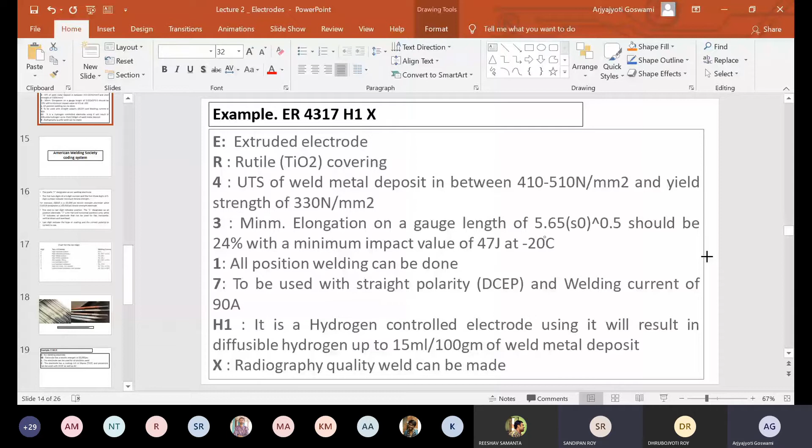होमोजीनियस नहीं हुआ दिक्कत तो डिपेंड करता है ना कि एप्लीकेशन क्या चाहते हो तुम। फॉर एग्जांपल स्टेनलेस स्टील की वेल्डिंग करने के लिए अगर बीच का मटेरियल स्टेनलेस स्टील नहीं होगा तो उसका थर्मल कैरेक्टरिस्टिक्स डिफरेंट होगा। तो मान लो बीच का मटेरियल तुम्हारा कॉपर है, स्टेनलेस स्टील को तुम ज्वाइन कर रहे हो कॉपर से, तो पहली बात तो है कि स्टेनलेस स्टील और कॉपर के बीच का जो जॉइंट है वो उतना अच्छा नहीं होगा।

कॉपर इज अ सॉफ्टर मटेरियल देन स्टेनलेस स्टील, तो जो जॉइंट है वो easily fail हो सकता है। क्रिटिकल एप्लीकेशंस, फॉर एग्जांपल अगर तुम बॉयलर बना रहे हो और तुम्हारे पास स्टेनलेस स्टील का बॉयलर का बॉडी है, उसको ज्वाइन करने के लिए तुम कॉपर वगैरह तो यूज नहीं कर सकते। मैंने बताया था ना आइडियल वेल्डिंग क्या होती है।

आइडियल वेल्डिंग में, there should not be any discontinuity between the welded portion and the base metal। So if it is not a homogeneous welding then there will be a discontinuity, प्रॉपर्टीज डिफरेंट हो जाएंगे तुम्हारे वेल्डेड जॉइंट के, फेलियर होने के चांसेस ज्यादा हो जाएंगे। तो इसलिए क्रिटिकल एप्लीकेशंस में होमोजीनियस वेल्डिंग ही प्रेफर करते हैं, जिससे कि हमारा मैकेनिकल प्रॉपर्टी सेम रहे पूरे जगह पे।

अब डिजाइन के क्वेश्चन किए होंगे तुम लोगों ने, वहां पे हम assume करते हैं कि मटेरियल इज isotropic एंड मटेरियल प्रॉपर्टीज are same throughout। तो वेल्डिंग करने में अगर हमारा homogeneous नहीं रहेगा तो हमारा वो assumption बहुत बुरी तरीके से fail हो जाएगा। फिर हमारे कैलकुलेशंस गलत हो जाएंगे।

फिर कैलकुलेट करके देखोगे हमारा बॉयलर तो सेफ है, और फिर बॉयलर में गर्म पानी आया, कॉपर मेल्ट होकर फट गया बॉयलर। फिर अखबार में न्यूज आ जाएगी कि सनसनीखेज वारदात हो गया कुछ। ठीक है, तो homogeneous weld इसलिए इंपॉर्टेंट होता है।

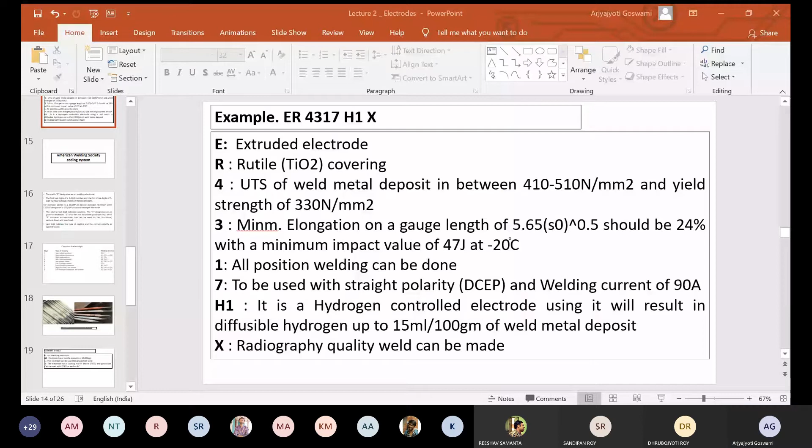सर ये जिसमें करंट का स्पेसिफिकेशन दिया रहता है सर, उसमें AC करंट से भी वेल्डिंग का कोई सिस्टम है क्या? मतलब is there any code for AC, because these are for DC only.

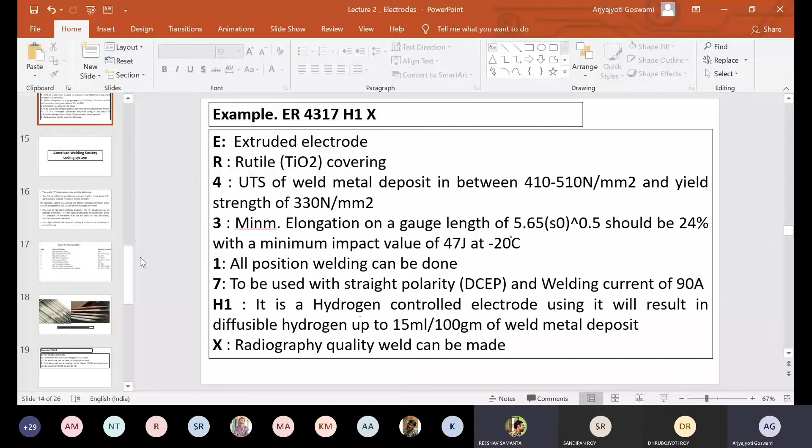DC only. See, this particular system of coding which we are discussing, this IS 814-1991 code, these are specific to DC electrodes only. So ऐज अ मतलब बोलने के लिए बोल रहा हूं मैं, जहां पे ये रहता है

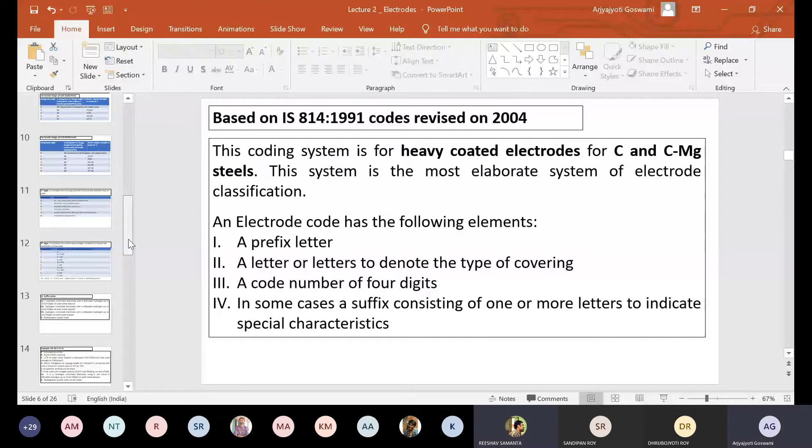कि you can use either DCEP or DCEN, most of them are better suited for using through AC supply. So but this is मैं लेमैन्स नॉलेज दे रहा हूं मैं, ऐसा होता नहीं है, मतलब टेक्निकली बुक्स में ऐसा नहीं होता। लेकिन अगर ऐसा इलेक्ट्रोड है जहां पे पॉजिटिव नेगेटिव कुछ भी यूज कर सकते हो, they are better suited for using AC supply।

But as per the book, if you go by the book, then only DC. This particular code is only for DC. Codes है नहीं, so maybe some separate codes will be there.

और बोलो, और कोई डाउट किसी को? नहीं है? चलिए फिर अगला शुरू करते हैं। तो is American Welding Society coding system, इसको हम AWS सिस्टम भी बोलते हैं।

हाँ बोलो, कोई डाउट किसी को? बोलो, कुछ बोल रहे हैं? स्लाइड नंबर 13, हाँ बोलो।

सर, वो एक बार उससे क्वेश्चन था, can I see that once? तुम्हारा आवाज थोड़ा सा ब्रेक हो रहा है यार, दोबारा बोलो। क्या?

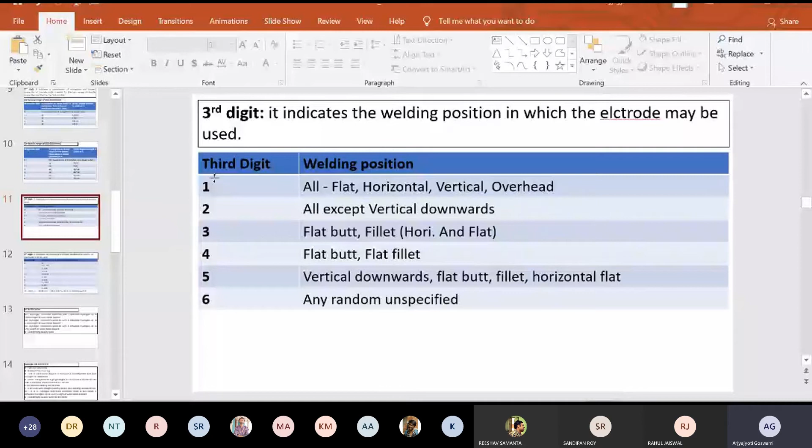Physics wala jo hai, electrode mein difference kya hota hai, how they are different in numbering. Why number 1 is suited for all position, why number 2 is only for all position except vertical? What is the difference in the electrode manufacturing, the difference is reflected in that point.

It means if it is an all position welding - flat, horizontal, vertical, overhead - any type of welding can be done. It means the electrode flux which is there will release a lot of shielding gas. The electrode wire which is being melted, its viscosity will be sort of high so that it will not fall back very easily. So the flux covering, the composition of the flux which will guard that electrode, and the composition of the electrode wire material - this is what it is.

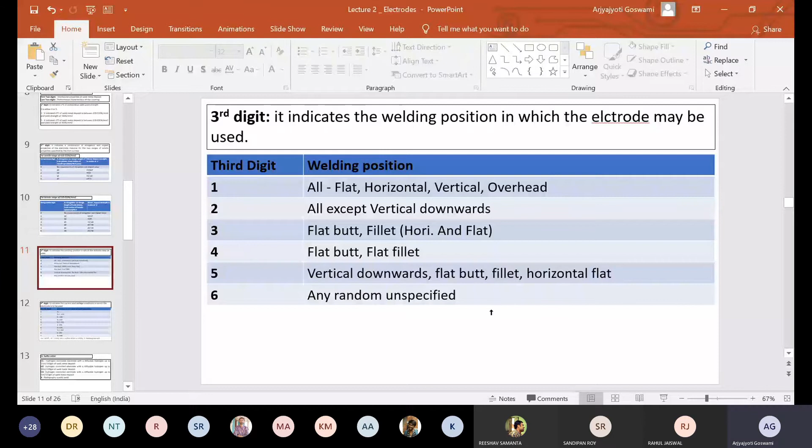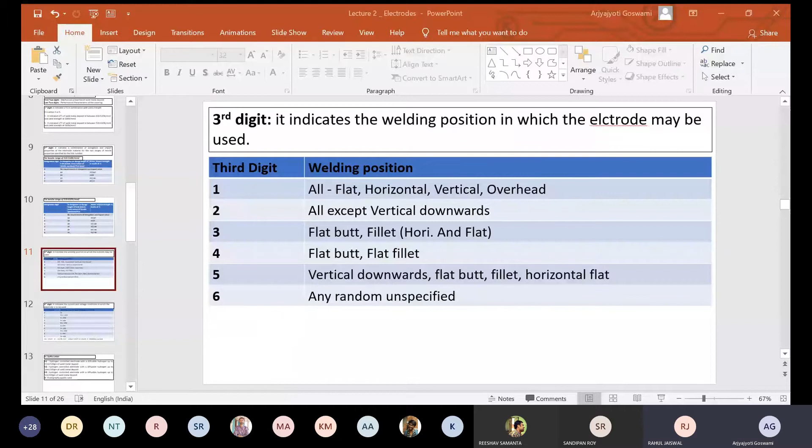Thank you sir, chalo. So American Welding Society - before going into American Welding Society classification, you should forget whatever you have learned about BIS. Forget means don't completely erase, but don't try to correlate that BIS was like this, AWS is like this, why is it so.

Don't try to just fit it in that fashion, but you should realize that AWS is a separate system of coding which has been done by a separate group of people at a separate point of time using a separate set of standards. So American standards, they are using some other standards - FPS system, foot, pounds and second system, right? We are using MKS system - meter, kilogram, second. So our standards will of course be different.

Also the BIS classification which we have seen just now is a more extensive sort of classification, but the AWS classification you will realize is very, very simple. And since we are starting it, maybe we'll be able to complete it also. It is a very simple system.

So there is a prefix E, which stands for the electrode to be used for arc welding - E for arc welding electrode. There is a 4-digit number. So the first 2 digits of a 4-digit number, or the first 3 digits of a 5-digit number, indicates the minimum tensile strength of the joint - whatever joint you are making, how much will be the tensile strength.

So I'll just clarify - there will be a prefix, followed by either a 4-digit number or a 5-digit number. So if it is a 4-digit number, the first 2 digits indicate the tensile strength, or if it is a 5-digit number, the first 3 digits indicate the tensile strength - the minimum tensile strength of the electrode.

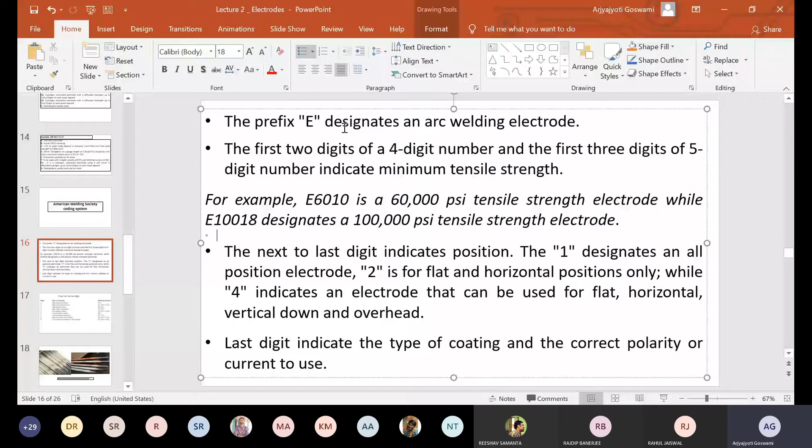It has different elements: a prefix, and a 4-digit or 5-digit number. If it is a 4-digit number, the first 2 digits indicate the tensile strength, the second last digit indicates the position, and the last digit indicates the current and polarity to be used. If it is a 5-digit number, the first 3 digits indicate the tensile strength, the second last digit indicates the position, and the last digit indicates the type of coating and the polarity to be used.

This is the chart for the last 2 digits. If the last digit is 0, the type of coating and welding current is this; similarly for digits 1 through 8. This is the chart to be referred to.

You should remember the prefix will always be E. The digits will be either a 4-digit or 5-digit number. The second last digit will always be 1, 2, or 4. The last digit can be any number from 0 to 8. The significance of 1, 2, and 4 is given here, and the significance of 0 to 8 is given here, telling you about the type of coating and polarity to be used.

Someone asked whether AC current can be used or not. AWS gives you the type of electrode for AC polarity. Most of the time AC is used for those electrodes which can be used in either DC positive or DC negative polarity - where either one can be used, AC is suitable for that most of the time. For some other classes they use other types of electrodes.

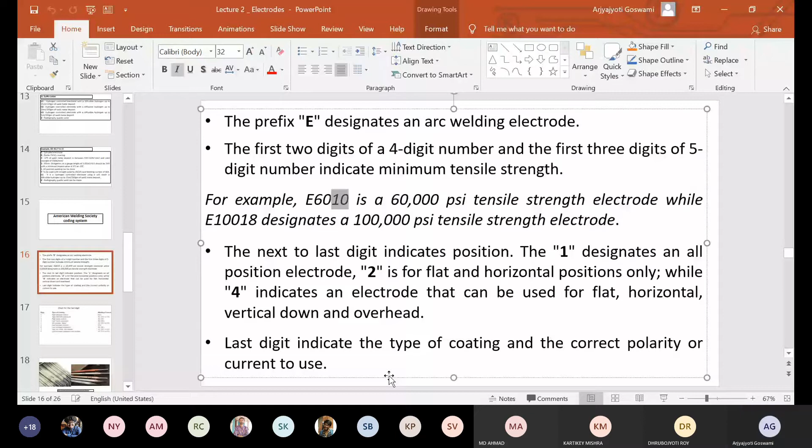The last digit indicates the type of coating, polarity and current to be used. It can be any number from 0 to 8, and the corresponding significance of these numbers is shown in the chart you've already seen. This is just a representative image of the electrode - these are the types of commercially available electrodes.

Mostly these electrodes are seen in welding labs, and even in industries you'll find similar ones. The only difference is that in labs we don't go for thick electrodes - the diameter of the electrode wire is not very high, usually not more than 5 millimeters, definitely not more than 1 centimeter. The coating thickness is also quite less for laboratory purposes, whereas in industrial applications, based on requirement, you can have different thicknesses.

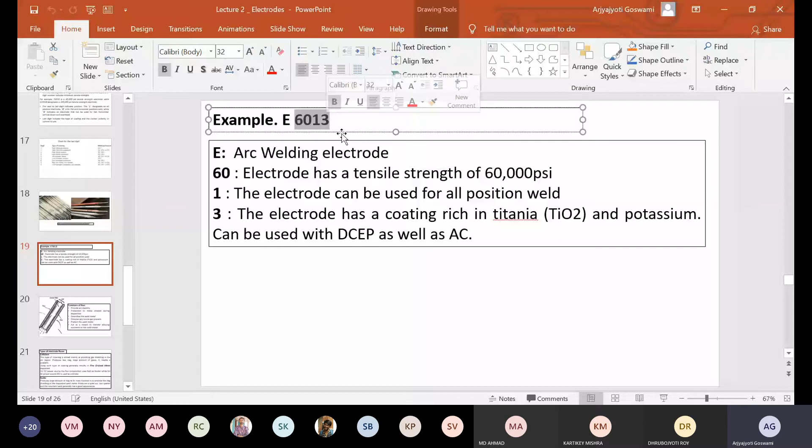So in this example we have seen different elements of the AWS system - E for welding electrode, followed by a 4-digit number. The first 2 digits indicate the tensile strength of the electrode wire material, which is 60,000 PSI. Then 1 stands for all position welding, and 3 means the electrode coating is rich in titania and potassium, and it can be used for DCEP as well as AC polarity.

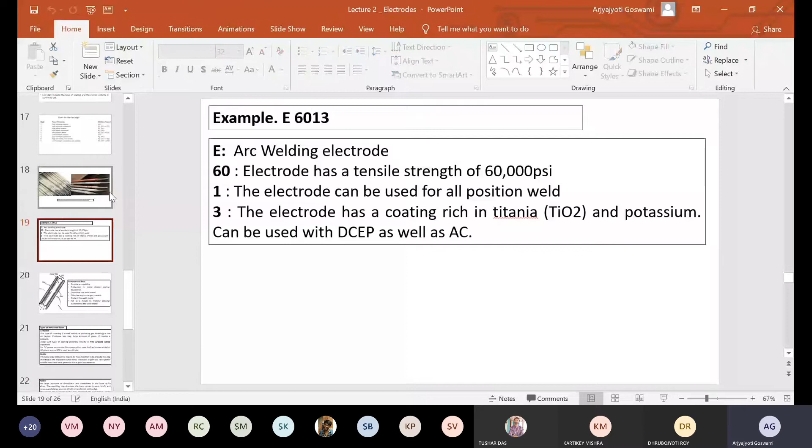So that was all for the AWS system. Today we'll finish the other portions of the electrode - we'll discuss the various functions of flux, which we have seen previously, just as a brief recap. Functions of flux: it should provide arc stability, and it should provide protection to the metal droplet during deposition. For arc stability, the flux will have some element which can aid in the formation and stabilization of the arc, elements like TiO2.

Similarly, once the flux is in, during the arc welding process the flux will dissociate and release huge amounts of gas. Those gases will give protection to the metal droplet during deposition.

Flux should also deoxidize the weld metal. Ideally, the flux should have some element which preferentially combines with oxygen, so that oxygen does not combine with the base metal and form any oxide, otherwise it will make the joint weak. So the flux should have an element which combines with oxygen, forms an oxide, and floats on top, from where it can be chipped out or ground off.

Flux should dissolve any solute gases present. Flux should protect the weld metal, meaning the flux will form a slag which creates a solid covering on top of the deposited weld metal, preventing further oxidation.

Flux can also be a means to transfer alloying elements. As I've discussed previously, if you want to add alloying elements into the weld but cannot change the composition of the electrode wire material, you can add small amounts as part of the flux, so that when the flux dissociates or melts, some alloying elements can enter the weld zone.

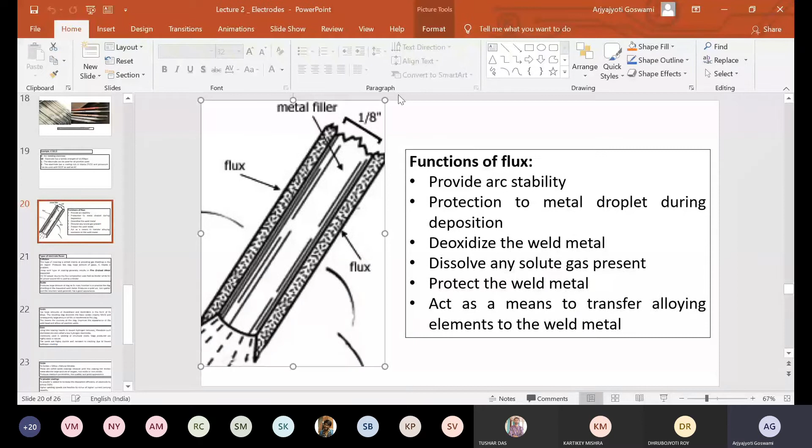So the functions of flux in detail we have seen previously, so I'm not discussing it too much right now. I'll move on to the types of electrode fluxes.

This type of electrode flux we have not seen previously. There are a few basic types of electrode fluxes. You should remember this from the BIS system of electrode classification, where we saw acidic coating, basic coating, cellulosic coating, and so on.

Cellulosic coating: whenever cellulosic coatings are present, the main purpose is to generate a lot of gases. We're not concerned with other types right now; of course it may still function in other areas, but its main function is to provide shielding. The cellulose will disintegrate and generate a lot of shielding.

So if you use this type of electrode, the slag will be less. It produces less slag but a large amount of gases, so that the shielding is proper.

Using such coating generally results in fine grained metal deposition. Since the slag is not being formed, the deposited weld cools very rapidly. If the slag was there, heat exclusion from the weld metal would be very slow, so it would remain in a hot state for longer. But with cellulosic coatings, since slag covering is minimal, it cools very rapidly and easily. If it cools fast, the grain of the weld metal becomes fine grained.

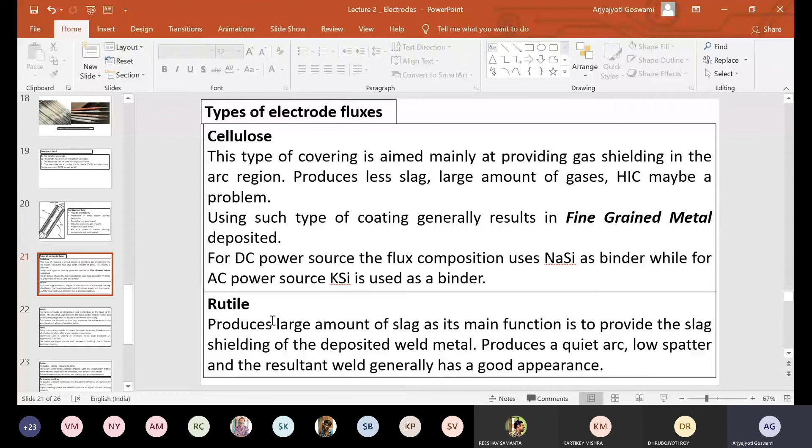Next type of electrode flux is rutile flux. Rutile is also called titania, also known as TiO2, which is the chemical name. It produces a large amount of slag, as its main function is to provide slag shielding of the deposited metal. It produces a quiet arc, low spatter, and the resultant weld generally has a good appearance. These things we have seen so many times.

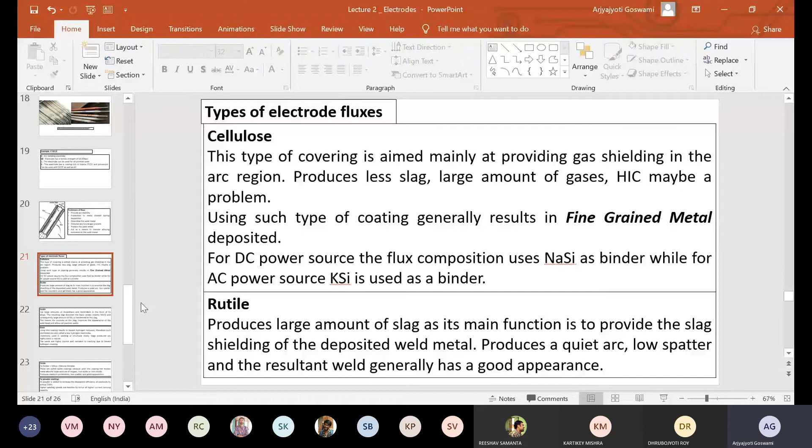Acidic coating has large amounts of oxidizers and deoxidizers in the form of ferro alloys. The resulting slag dissolves the basic oxides, mainly manganese oxide, and consequently a large amount of manganese is transferred to the slag. This type of coating, acidic coating, is specifically done for carbon manganese steels, where manganese is in large quantity.

If manganese is in large quantity during welding and is not excluded, it forms other compounds that become part of the weld deposition, which may create problems in the welding. So some manganese has to be precipitated out. In those cases, acidic fluxes are good, because they generate slag which readily combines with manganese oxide and takes out the manganese.

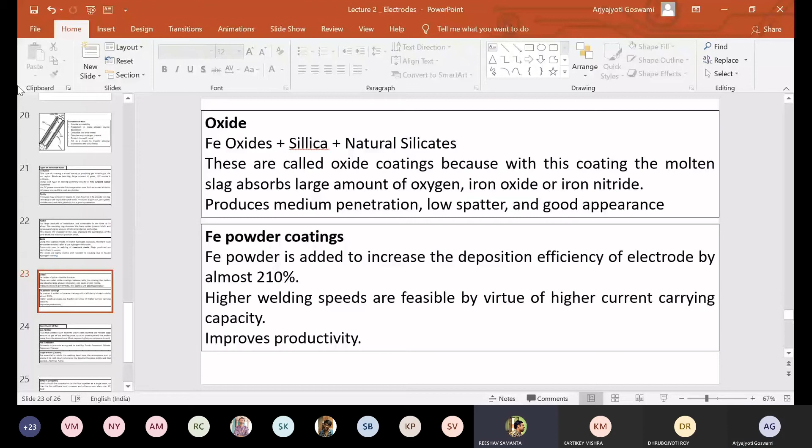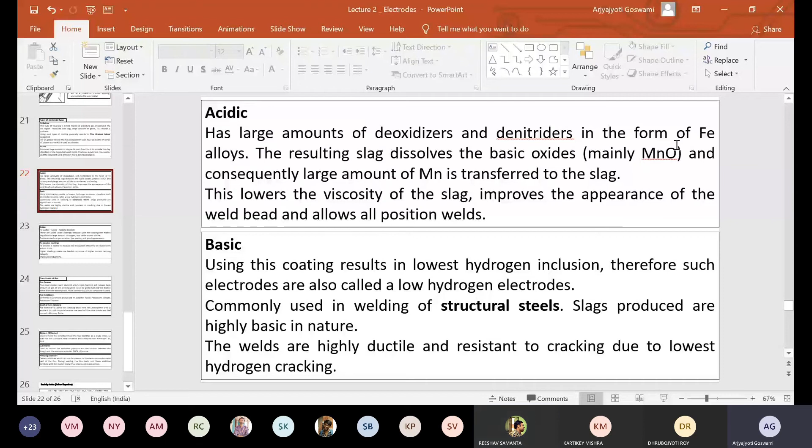So constituent of flux, what should be the elements of a flux? This you know very well. Constituent of flux: there are gas formers whose main purpose is to dissociate and release lots of gases which can create shielding so that the weld zone is protected.

There are arc stabilizers which promote arcing. So arcing will be easier using them, and they also lend some stability to the arc.

Then we have slag formers, basically oxides of some form, either aluminum oxides or titanium oxides. Slag formers generally form the slag which floats on top of the deposited weld metal and protects it from the atmosphere.

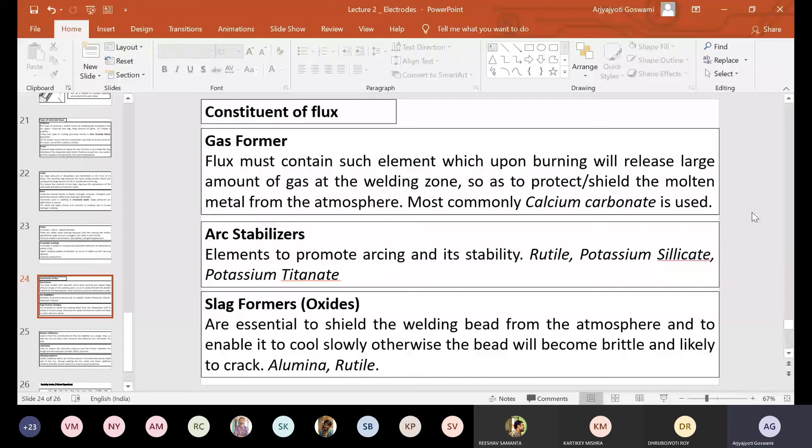We have binders. Binders are used to hold all the elements of the flux together. Mostly binders are silicates, either potassium silicates or sodium silicates. They promote cohesion and adhesion inside the electrode.

Lubricants, as I told you, electrodes are manufactured through an extrusion process. So use of lubricants is preferable, so that extrusion is quite easier. You don't have to use a lot of pressure, you don't have to generate a lot of friction. The lubricant reduces the extrusion pressure and also reduces the friction requirement, so the electrodes are produced quite easily. You should remember that using lubricant is good, but you should not use it too much.

You should not use a lot of glycerin, otherwise glycerin will become a main constituent inside the electrode. And during welding, glycerin fumes will come up, and glycerin fumes are sort of poisonous. They can cause a lot of irritation to the eyes if the glycerin fumes are there.

So normally after the electrode has been manufactured, they are put into a baking oven. So if any glycerin particles are there, mostly during baking, the glycerin is fumed out. But if you use a lot of glycerin during preparation, it will enter inside the flux thickness, so during baking it may not come out. Then during welding, the flux will dissociate and it will come out, and the glycerin fumes are sort of dangerous for humans too.

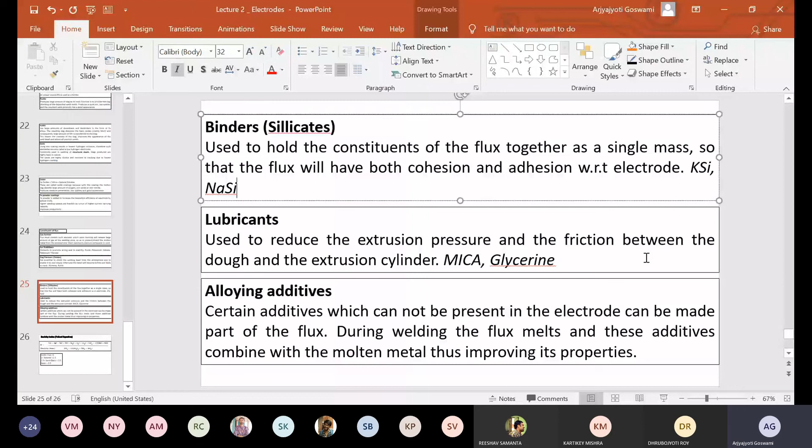Okay, and any sort of alloying additives. Alloying additives, as I told you, any sort of alloy which you want to add, which you want to make part of the weld metal, you can add them in the flux and it will enter the weld zone.

Mostly chromium is one major thing which is done. Chromium powder is mixed during flux preparation, and then during extrusion it is applied on top of the electrode so that chromium can enter the flux.

Chromium leads to anti-corrosive properties. Chromium readily combines with oxygen and forms an oxide on top of it. This is during the operation, not during welding.

If chromium is there—because stainless steel, why is it called stainless steel? Because it does not form stains. Where will stains come from? Stains come because of corrosion. So SS does not corrode. Why does SS not corrode? Because chromium is there. Chromium readily forms oxide with atmospheric oxygen, and a very thin layer is formed on top of the SS items so that oxygen cannot penetrate deep inside. That's why it remains stainless. That's why you call it stainless steel.

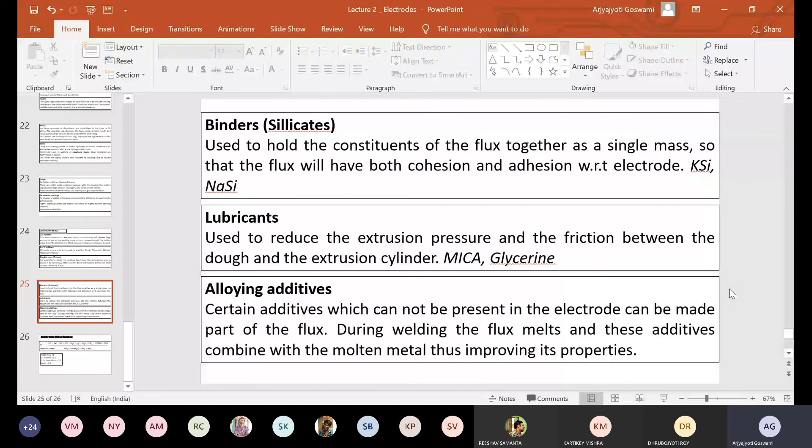Last thing, the basicity index. There was one scientist named Tuliani who gave this equation for calculating the acidity or basicity of the flux. Since it is part of his syllabus, we are discussing it. Practically, if you ask, this does not have that much implications, but of course this is something we should know—whether our electrode is an acidic electrode, or whether it is neutral or basic. Because for some applications, for example welding of structural steels, I told you have to use a basic electrode. So most of the times you will be knowing what sort of electrode you have been given.

But if you don't know, if you are working in a lab and you want to designate the electrode, you have to use this equation. Basicity index is given by the ratio of these two: calcium oxide plus magnesium oxide, barium oxide, strontium oxide, sodium oxide, potassium oxide, lithium oxide, calcium fluoride, and half of manganese oxide plus iron oxide.

Divided by SiO2 plus half of aluminum oxide, titanium oxide, zirconium oxide. Now how did this equation come? I do not know why these calcium, magnesium, barium, strontium are in the numerator, why these are in the denominator, I don't know. But this equation you have to use.

You have to remember these elements are weight percentages. Calcium oxide means the weight percentage of calcium oxide inside the flux. Similarly weight percentage of magnesium oxide and so on. Using this we can calculate how much is the acidity of the flux or how much is the basicity of the flux, and based on that we can designate it.

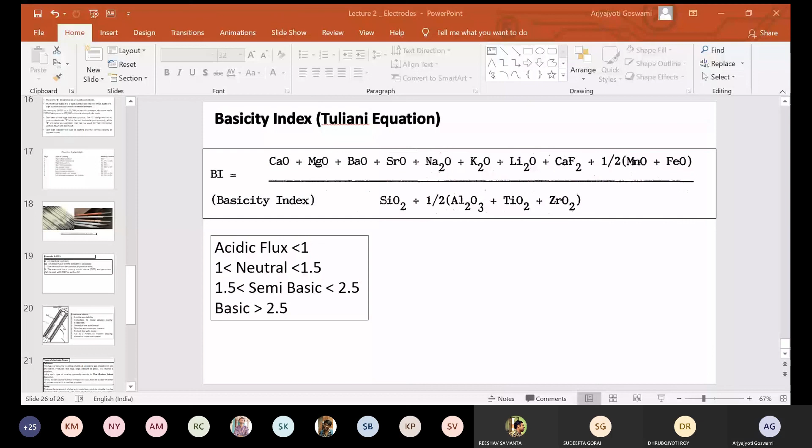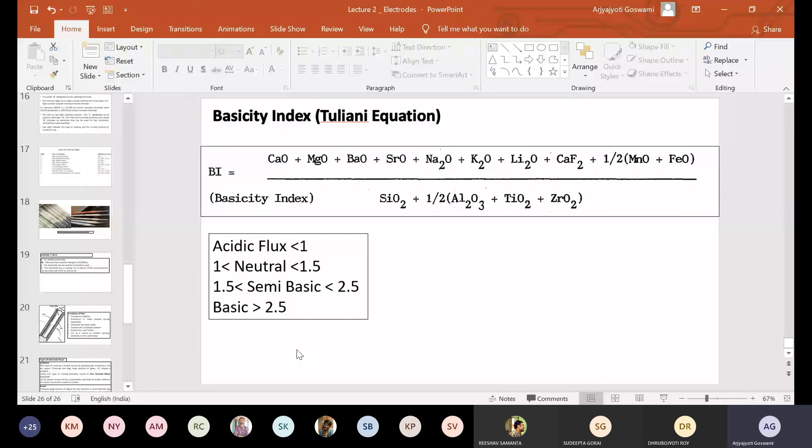So from this discussion, I hope now you know about electrode coating. So next time when you go for welding, when you see an electrode, try to look at the back of the electrode, try to look into this region. There you will find some kind of numbering, some kind of coding. Try to figure out what that coding is, or go to the lab in charge and ask him to show you the electrode box, the box in which the electrodes come.